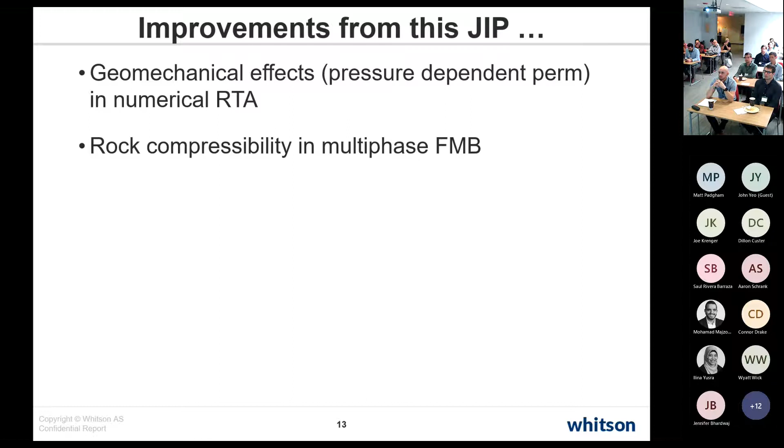Just to mention a few things we've added as a result of the consortium: being able to account for geomechanical effects in both the fracture and the matrix in the numerical RTA workflow. Adding in rock compressibility as an input to the multi-phase flowing material balance without rel perms. That was super interesting - we had some cases, very, very high compressibility systems in Vaca Muerta, and we saw that it was really, really important to account for this. Also multi-layer numerical models, not only petrophysical numerical models, but also having different fluids or PVT in the different layers.

Fractional RTA is another thing we've included as a result through these interactions with you all, but there's also a lot more.

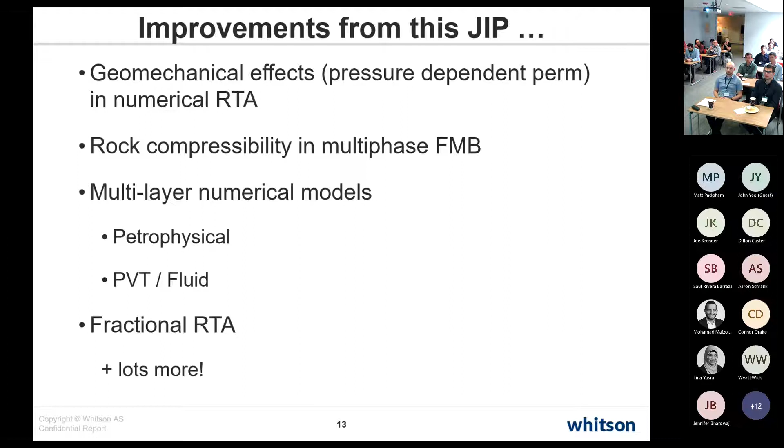And we're very proud to actually have - I did a counting yesterday just to have a sense of how many wells we've been able to get in with production data, so that's rates of all the phases - and that's actually more than 50,000 wells. And if I took in all the wells where we just have PVT calculations and stuff, it would be more than 100,000 wells that we've had in the software throughout this last year.

So really good, and we have really appreciated all the community and all the feedback you all have been giving. I feel like almost everybody in the room here kind of has their own little feature in the software, or something they've requested that we've been able to get in there.

So just continue to do that because we take that very seriously, and literally every single feedback we get from you all, we put it in the backlog, and then the priority of when we'll implement it is just a function of how many people have asked for the same thing. And we try our best, when we have a feature implemented based on a request, to also follow up with people to let them know if we've been able to get it in there.

Great, so that was a quick update on the consortium we've had, and we'll also see some other results of that, more practical, a little bit later. But just so it's easier for you all to digest what's going to be presented here - not by me, because I'm going to present just more basic things - there are a lot of presentations later today that will probably assume that you know at least a certain amount of RTA.

I want to make sure everybody is on the same page before we go there. I'm not going to go into nitty-gritty equations, I'll keep it practical, but I'll repeat some things throughout the day because they're fundamental. The first thing I always show, and some of you have seen a million times, is very fundamental.

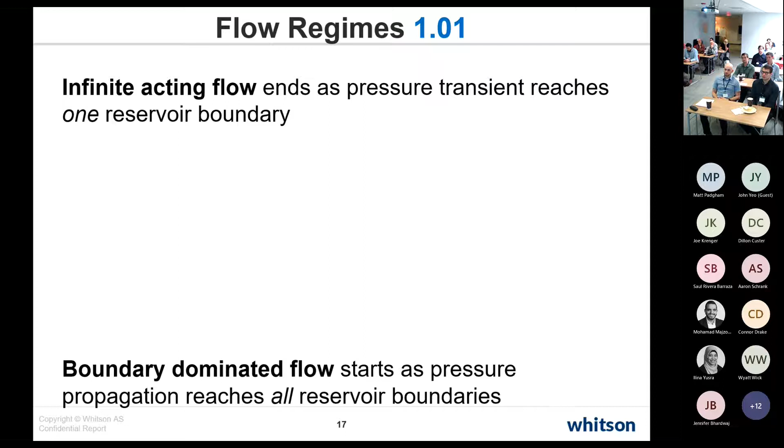Rigorously, boundary dominated flow starts once pressure propagation has reached all the reservoir boundaries. Then there's a very important flow regime, highlighted more throughout this consortium, called transitional flow. Transitional flow is in between these two extremes - some parts of your reservoir are still infinite acting, and some parts are in boundary. It looks like a power law relationship on well performance.

This is super important and something we'll talk more about later today. That means if I'm a well here, I might have started feeling the boundary over here, but haven't felt the wall over there yet, or the wall over there, or over there.

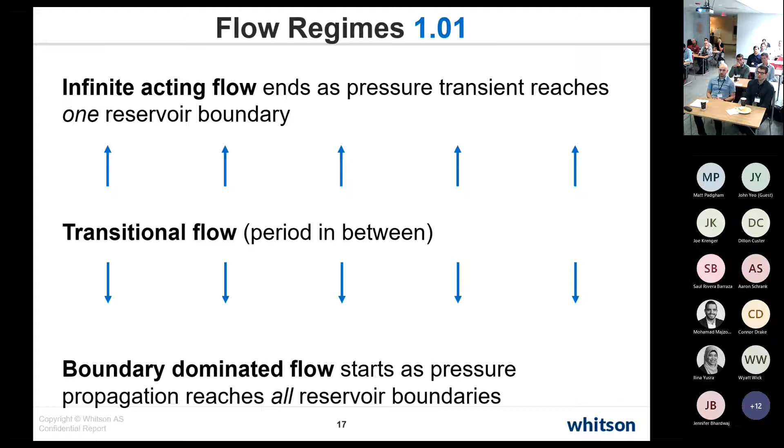Second thing is what we can derive from RTA. If you have production data, bottom hole pressures, and PVT - if those are the only things you have - you can still do RTA. You don't have to know the height, well lateral length, etc. But the things you can resolve are only two: your A-root-K, which correlates with typically early time cumulatives like 1-year or 90-day cums, and the contacted oil or gas in place.

But it's very important to remember, if you don't know the flow regime, talking about these things doesn't make sense. Your A-root-K can only be observed if you truly observe infinite acting linear flow. And for contacted oil or gas in place, you have to be in full boundary to say what it is. So if your well is still transitional or infinite acting, you can't say with certainty what your OGIP or OIP is, and you can't say anything about your final EUR because you haven't seen the whole tank.

It's impossible to do that exercise. This is extremely important because many of the wells we're dealing with might have seen some boundary effects, but it takes a long time before you're in full boundary, or you need very tight well spacing to see it.

When we talk about contacted oil and gas in place, don't mix it with petrophysical oil and gas in place. There was a survey earlier this year - we asked companies, if you take the petrophysically mapped oil and gas in place and compare it to what you resolve from RTA, there's basically a haircut of almost 80 to maybe 60%.

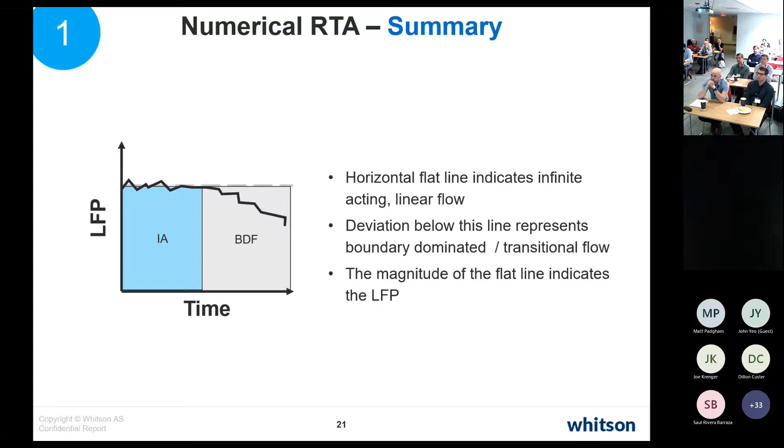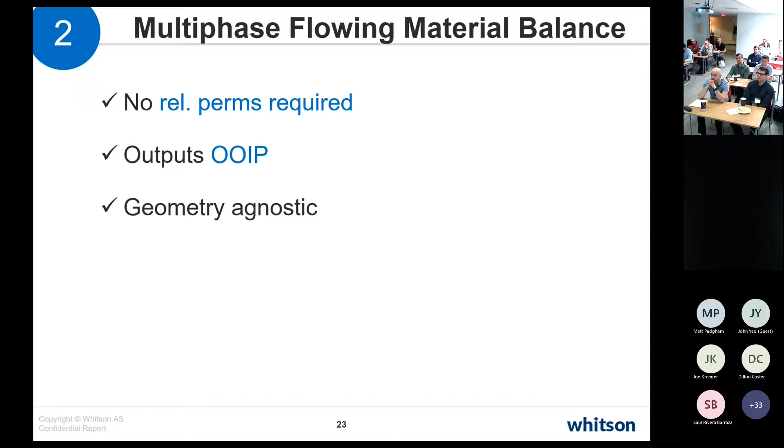So when people are showing this later, that's it. Multi-phase flowing material balance - we know this method, we talked about it many times before. It does not require rel perms. It outputs the contacted oil or gas in place. It does not care about geometry, but it assumes boundary dominated flow or pseudo-steady state.

So what does that mean for when you do RTA? Well, it means you can use it as a lower estimate, or the estimate if you're in full boundary. So many times people are like, yeah, I get a much lower original oil in place from my multi-phase FMB compared to what I get from numerical RTA. Well, it's probably an indication that you're most likely still in transitional flow or infinite acting, at least transition. So a lot of people here use it to bound RTA work, or at least question your RTA work.

And we'll see that's super interesting with the interpreters - I think everybody did it independently, but all of them used it to kind of question some of their results and did it iteratively from there.

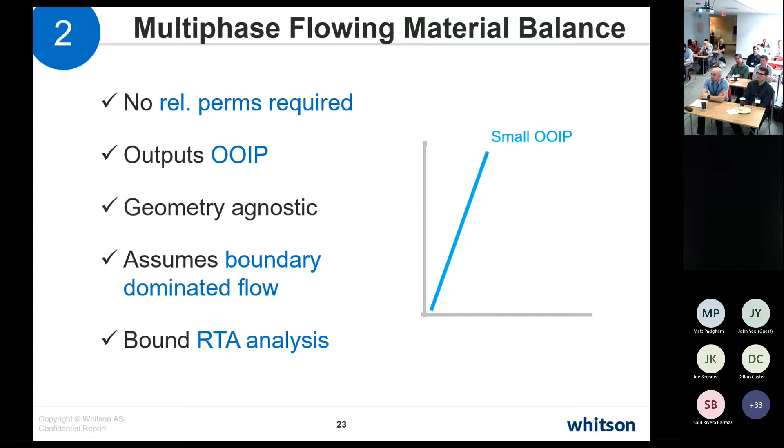The diagnostic plots are super simple - just some plots or points on a graph. You're trying to pick the shallowest slope that you see. The inverse of that slope is your pore volume. So this is a small OIP, this is a big OIP, and this is a bigger OIP, and that's it.

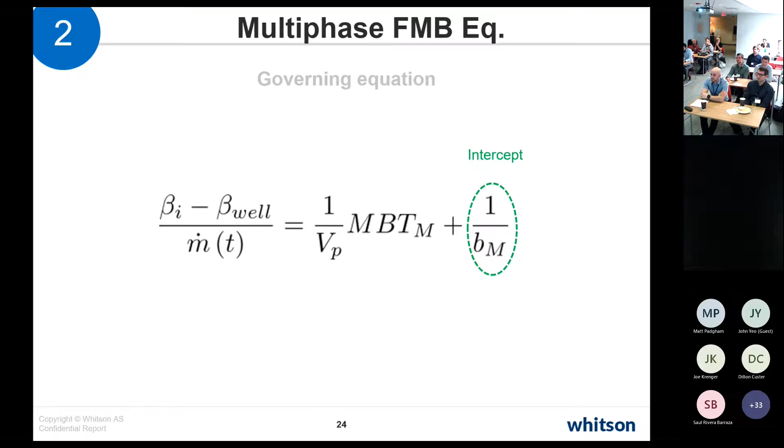The equation - I promise no equations, but it is actually super simple. So it looks very dangerous, this equation, but it's actually very simple if you break it down. This is an intercept, material balance time, pore volume, mass rate - so think oil, gas, and water, all added up together in a tank just on a mass basis.

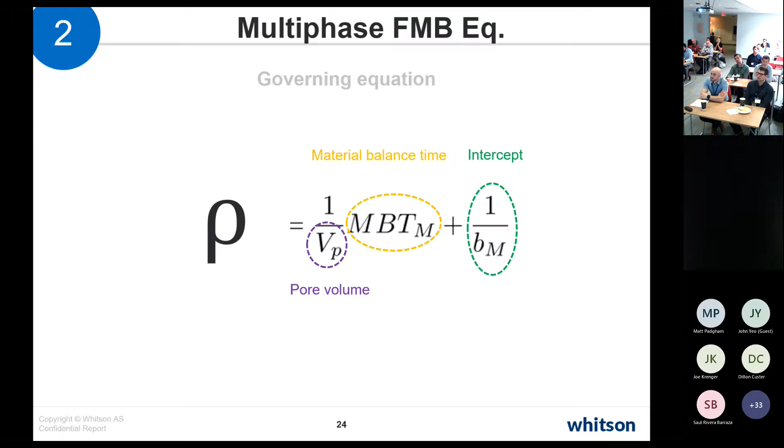And then this is something called mixture density change. What is mixture density? Think you have a tank, oil, gas, and water - they don't actually mix, but you can measure the volume and you can measure the mass. So just think about that, it's kind of like a multi-phase density, if you like. If you multiply mass rate on both sides here, it's actually something that's really dear to our hearts: density is equal to mass over volume, just multiply.

And the beautiful thing about it is that it's also a linear relationship, which is what everyone here in the room likes. If you're an engineer, the dream is to have something that is extremely complex but simplified to a linear relationship. So that's multi-phase flow, highly nonlinear PVT.

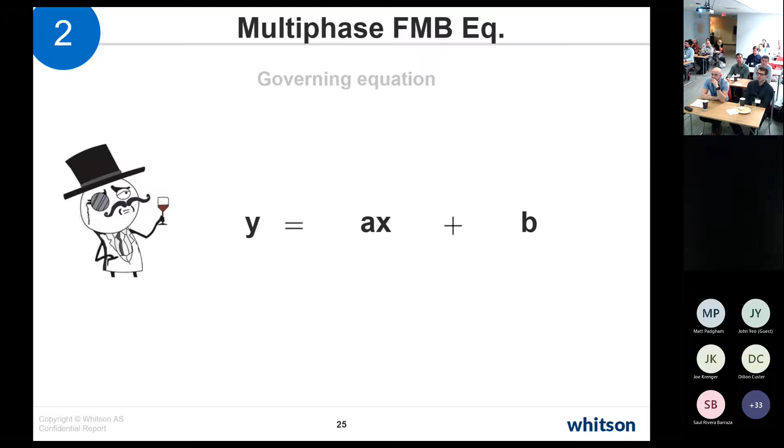Superposition effects, etc. The big thing about this method is that it does not require rel perms. And that's a question we get a lot, and we spent some time in the course last month to talk about why we do not require rel perms here. That's obviously unique, right? Because rel perms is something we really don't have for many rocks, at least in unconventionals. The short answer is this.

So rel perms and PVT, what does that give us? These two things together, they give us fluid ratios. And what is fluid ratios? Fluid ratios is water oil ratio, CGR, OGR, you name it. That's fluid ratios. But what we're doing with the multi-phase flow material balance method is that we're actually using the historical data only to back out the fluid ratios. We use the fluid ratios from the field, and we don't need rel perms for that.

But if we went into a forecasting exercise from this methodology, then maybe you would need rel perms. But that's also why in that feature in the software, for instance, we're not forecasting based on rel perms. We're just forecasting the fluid ratios versus time.

And just to make that 100% clear, if you look at the formula, for instance, for producing GOR, right here, this is producing GOR. This guy right here, that's a solution GOR. These guys right here are just PVT properties. So these are PVT properties. And these guys right here, KRG, KRO, that's rel perms. So fluid ratios, and there's an equivalent equation for all ratios like this. So it's just PVT and rel perm.

Okay, and the reason why we don't need it, the short answer, is we're using whatever we have in the field, or if we're doing a forecasting exercise, we forecast the ratios instead of using rel perms. And it's just extrapolating that trend.

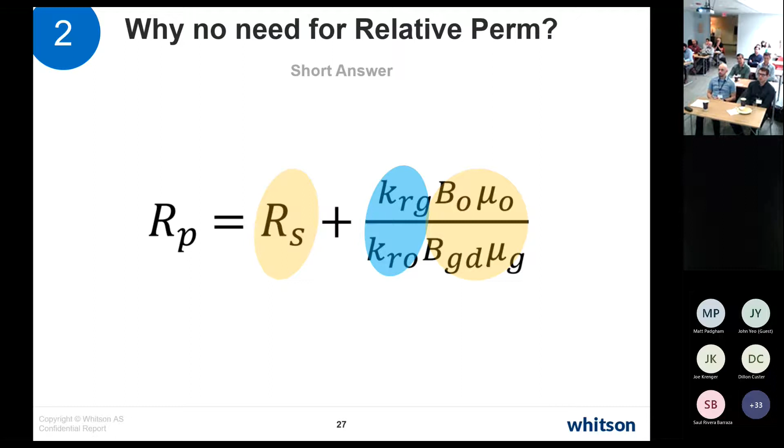The last thing is fractional RTA. What's the difference between classical RTA and fractional RTA? Well, classical RTA gives us LFP equal to A root K. And if you think about it, back to school, what is A root K? That's just AK to 0.5. We'll call that term delta, the 0.5 term. And then Jorge from Chevron, he and that group came up with fractional RTA, just a more general way of solving for your LFP.

So now in fractional RTA, you can solve for any complex system of fractures, and what you're resolving in terms of LFP is a k to the delta. My analogy is always that, okay, if you do ARPS, the classical RTA forces you to always do ARPS with a B factor equal to 2 on every single fit, and now you're allowed to change it from 2 all the way down to 0. Very simple way of diagnosing the delta for a given well.

It's literally just a rate normalized pressure plot versus time. This is exactly the same thing you do on the square root of time plot, by the way. This is just exactly the same thing on the y-axis, but you just do it versus real time and then not square root of time, and you just do it log. So you can do this in Excel very easily in Whitson Plus, etc. And the exponent here, or 1 minus that exponent, that's your delta.

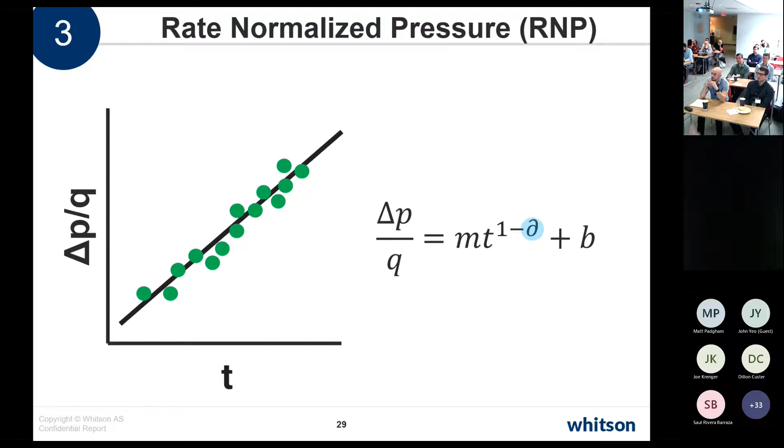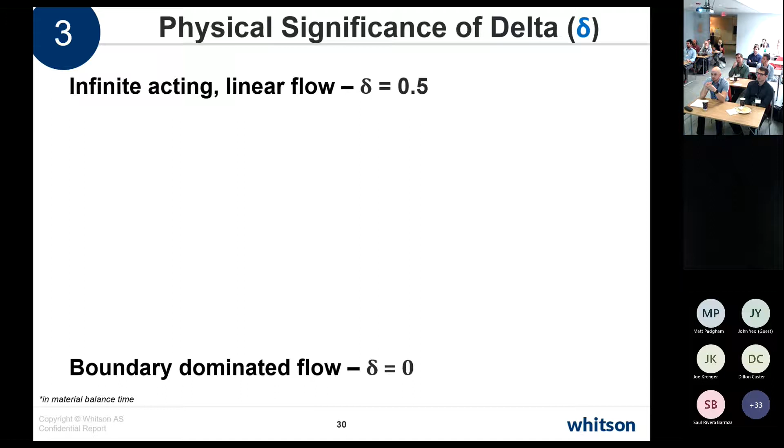And why do we need delta? Well, the physical significance of delta, when delta is 0.5, we're infinite acting. Boundary dominated, delta is 0. So remember, this is all in material balance time. And if you're in transitional flow, the delta is somewhere in between. There's a very nice diagnostics to tell you, okay, where is my well in terms of flow regime? And it's very, very important to do that.

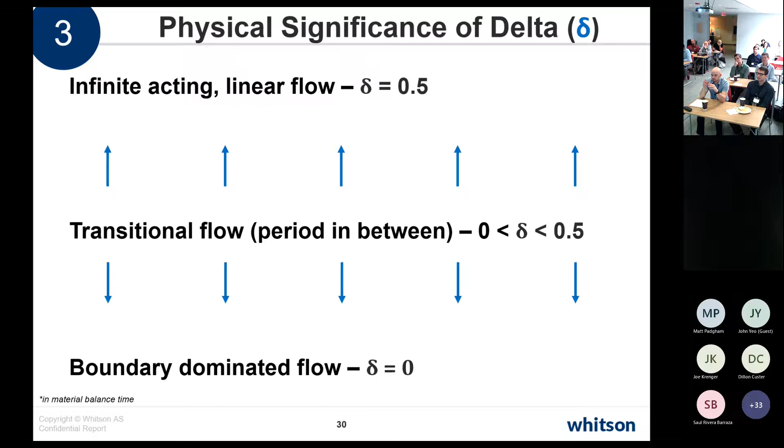Okay? I think everybody now, that was even less than 10 minutes, which is even better. So that's the crash course in terms of at least the new things that people haven't been exposed to before.

I'm going to spend 2 minutes on this thing, what I call anomalous confusion. So there's been a lot of things in the industry the last 10 years, I think, about we need new physics and everything to understand unconventional well performance. And it's been like, classical diffusion doesn't work for the purposes of unconventional rocks. We need new type of physics, typically referred to as anomalous diffusion. So I'll just give a couple of thoughts around that just for the group here. So because it's very relevant for the group.

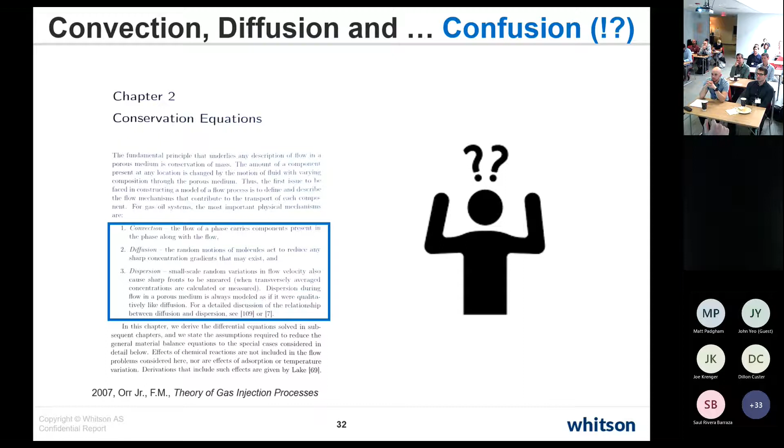So when it comes to all of these terms, convection, diffusion, it all leads to confusion in the end of the day. But there is a claim in the industry that unconventional wells do not exhibit classical Darcy behavior, but rather a power law behavior that results from anomalous diffusion. And that's a claim.

We all agree that we see power law type of behavior for a lot of unconventional wells, but that in itself is not evidence that we're dealing with new physics, anomalous diffusion. We've talked about this many times throughout this project: you can go to a pad and see a wide range of deltas on the same pad. Some deltas are 0.5, and Darcy flow is perfect, it's not a true power law relationship, and it goes into boundary at some point.

That's like the legacy completions. Then you have some that show a 0.3 power law relationship for their entire life. Then you have some exhibiting a delta of 0, so boundary dominated from very early on. My point is that if it was just the rock, or something special with the rock, every single well on that pad, no matter how you completed it, should give you the same indication of a power law type of relationship. We don't see that in reality. We see a mix of it.

That's going back to getting this type of relationship. You can get that from just a mix of infinite acting flow and boundary dominated flow. There can be a lot of things that cause it, so heterogeneity is a very easy way to model it. And if you add superposition effects and multi-phase flow effects as well, you can get it in many different ways. So there's not only one answer to that.

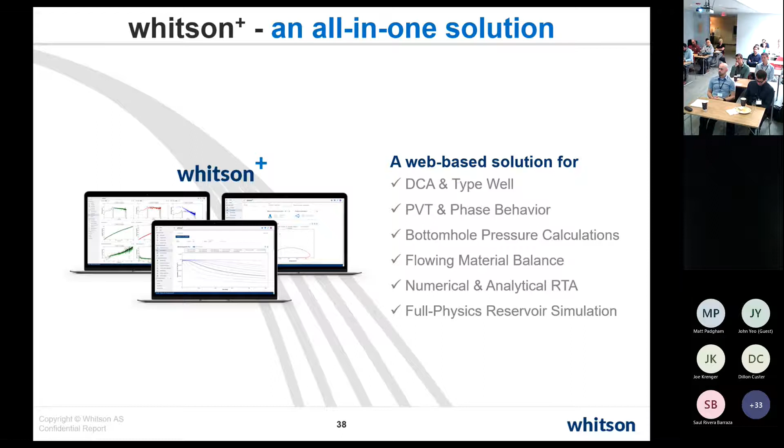The last couple of years have gone very, very fast. A little more than two years ago, we wrote the first line of code for the software, and since then we've been extremely lucky to work with now close to 50 different operators in unconventional. That's been happening very fast. But in general, our mission is to just keep it simple.

When we talk about making it simple, it's not only about the user experience, we want to make everything about the product as simple as we can. So we want to make it one product. That means all the features that make sense to have in whitson Plus, we'll keep them there for that audience, all the currently developed features and all future modules. There's also one price, so everyone knows that, with an unlimited number of seats, which is also super simple. It's one interface, and you just find it on the web, so it should be seamless to move from one module to another.

And then for most companies, or at least the companies that would like to have it, we offer single sign-on. So you just go to your company name dot whitson dot com, click single sign-on, and you log in with basically your email.

So we try to keep it simple, not only on the user-friendly side of things, but also when it comes to working with the product and the pricing and so on. The other thing we try to keep simple is the cloud integration, and that's been very successful with at least the companies that have been interested in doing that.

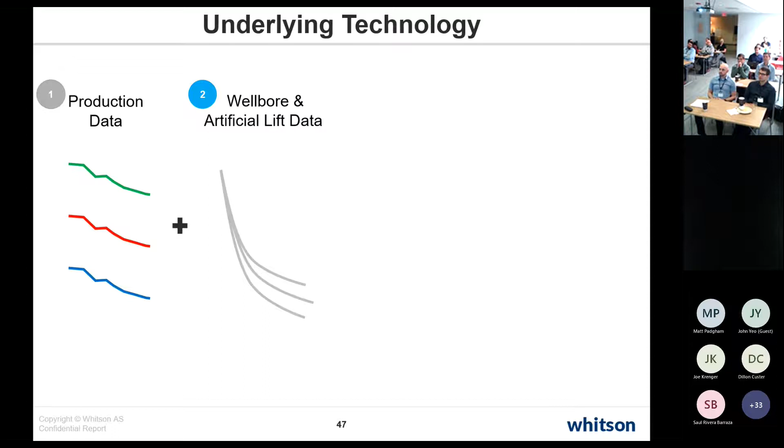So you have production data, you have your artificial lift and wellbore data. You marry that with some integration of choice, and it results in you being able to compute bottom hole pressures on every single day for every single well. So when you open the tool, you have production data for every single well updated until today, and bottom hole pressures updated until today on every single well.

It sounds like a big thing to do, but we have multiple of the clients here today, and we've been able to set this up in less than a week on all the wells they have internally. So if you want to make it quick, it's very easy to make it quick.

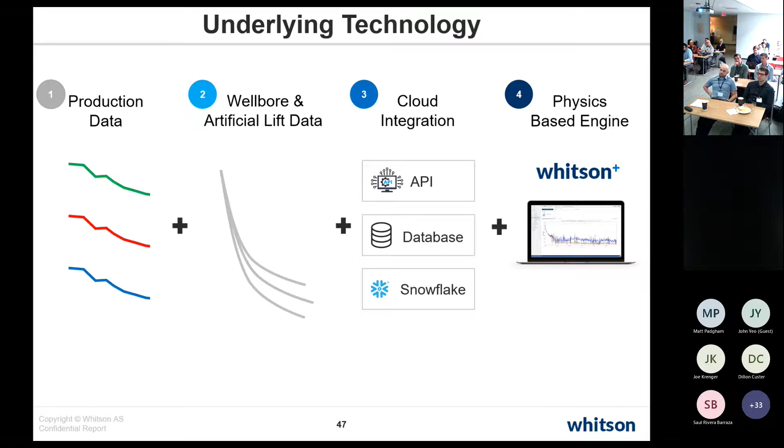In general, we've also tried to focus on getting new technologies into the tool. But probably most importantly, from here going forward, our goal is to have the best support in the industry. That's very important for us.

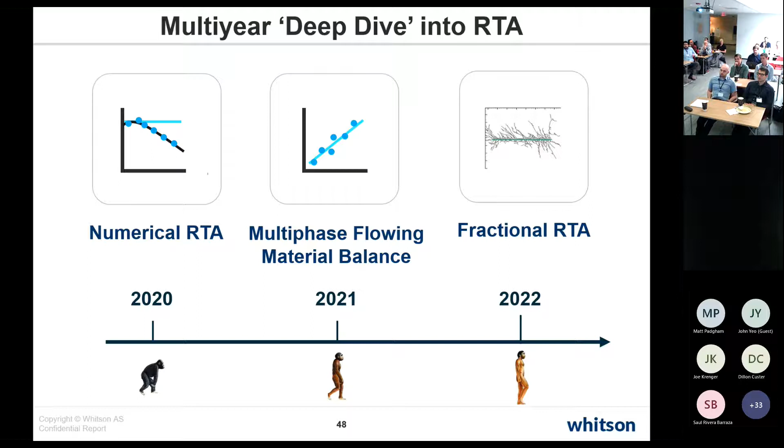On average, our response time to support tickets is less than 2 minutes. Obviously, if it's a feature request, we can't always get back in 2 minutes with a new feature, but being responsive, letting you know we're here to help you with whatever it is, using the tool, or just brainstorming about different items you're observing with your data, is something we take extremely seriously.

Everybody on the team, whether developers or people more on the technical side, shares this joy about working tightly together with the users. That's the only way we've been able to get the tool so far in less than 2 years, and in that direction. So there's a release this week.

There's a bunch of new things, but I'll focus on some of the main things. Stian will have a presentation on one of them. The biggest thing that has been requested by all of you, and I'm so glad it has come in this release, is really related to saving cases.

So if you're doing any type of modeling on the physical front, let's say a numerical model, numerical RTA run, multi-phase flowing material balance, or maybe a bottom hole pressure run, you can now go in as a layer under the well view here, where you can create a sensitivity. That means you're not creating a new well, you're just creating a sensitivity under the well layer, and you can see all the sensitivities you run under the well level.

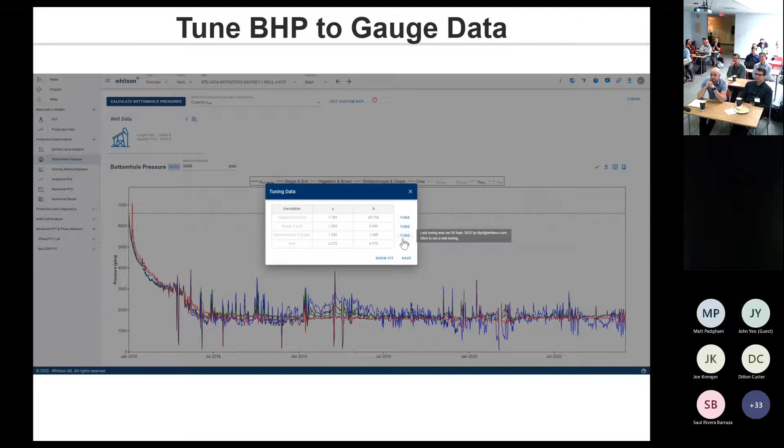Even though I know a lot of you have done more field-wide studies of bottom pressure and comparing which correlations are doing better and whatnot, a lot of the studies that we've done, at least with this group, yielded pretty good results.

The last thing is, one of the most popular features in the tool is that when you calculate your bottom pressures, you're able to smooth the bottom pressures graphically, and you don't have to do that in Excel and stuff, and that's a big time saver. Based on requests from Stephen Young and others, being able to do that on every single time series data that we have in the tool is something we're now allowing for.

So why is that important? It's important because many times we're dealing with allocation issues, etc., in the production data that we have. So you can say that parts of the data I would like to smooth, maybe parts of the data I would like to shift up because of an obvious allocation issue. Maybe the tubing pressure is obviously off, maybe there's some outliers that don't make sense, maybe I'd like to ignore them. I can do that very easily.

And then you can choose whether you would like to use the raw data, or whether you would like to go in and actually use the smoothed version of the data. So that's also coming in the release. I got a note from Marcus, our CTO on the software side, that we're releasing it for everyone tomorrow. This can be parts of the data, several parts of the data, etc., but it's extremely powerful to do that on all the time series data, just in the interface itself, because a lot of people have done that in Excel and then moved it back in, and it's really, really time consuming.

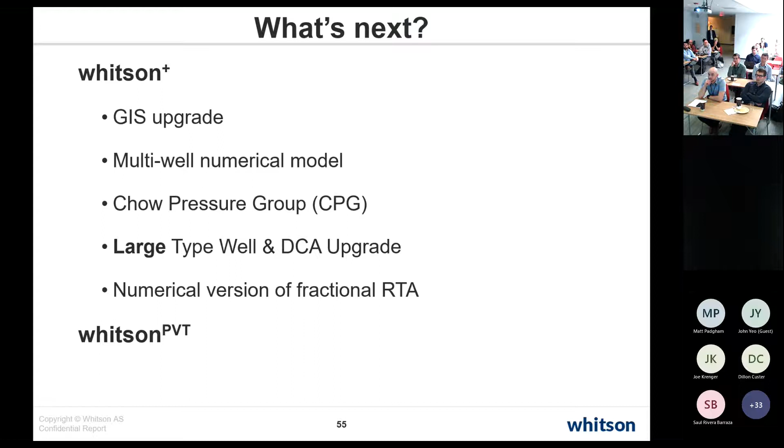So in Q1 of next year, we're launching something called whitson PVT. It's a whole separate product, so it's not necessarily relevant for all whitson Plus users, but it's basically a competitor to PVT Sim. We'll have fluid data management, so instead of uploading wells, you're uploading samples and lab data. Then you can create field-wide equation of state models in that tool, and easily export or import those into whitson Plus if you'd like.

Marcus will mention a few more things on that later. And I think that's probably it. Any questions?

Yeah, I have a question. Does whitson have any intention to do a similar JIP for DFIT tests, reservoir pressure across multiple companies? So like on DFITs, you said? If people want to do it -- no, we haven't thought about that.

I know there's some -- you've been involved in some of the DFIT consortiums as well. Maybe Craig, you were at least in one in the Bakken, right? Early on, ResFrac did a DFIT JIP. And so it was more to advance the analysis than to develop analysis tools. Yeah, and that's been published -- you can pick up the paper by Mark McClure, the principal author.

If there's big interest on that -- initial reservoir pressure is a big uncertainty, right? Initial reservoir pressure and also flowing bottomhole pressures, those two things are super important when you do RTA. If those are off, then you're kind of screwed already. But that's maybe something we can look into if there's any interest on that front.

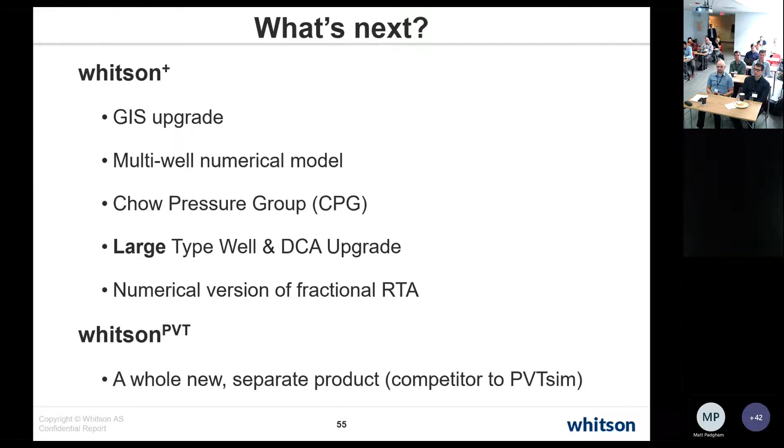Are you thinking of putting something related to flow assurance? Yeah, flow assurance related calculations will be there - hydrate models, asphaltene models, etc. will eventually come in. So it's going to be a full competitor to PVTsim. That's going to be a big focus. And we have people like John Ratalovsky working on that, who was with Schlumberger.

That would be great. Next up is Marcus. The reason we have this presentation is that everybody who uses Whitson Plus does a lot of thermodynamic equation of state calculations by very simple means. Our biggest message is that it's not magic or a black box - it's based on a very rigorous process developed, with Curtis Whitson in the front row, over the last 40 years. It's only built upon physics, mathematics, thermodynamics, etc. Marcus will run you through how you can quickly get a good understanding of how that work is done. So with that, Marcus, take it away.

Good, yeah. Don't worry, you're not going to have to do any thermodynamics here today. I mentioned to Braden already - this is the time, if you're not interested, to sneak out and get a drink early if you're that type of person. There's a song, it's five o'clock somewhere. Actually, for people in Norway, it's five o'clock now, so they're probably having a couple drinks already, so that's fine. I want this to be a practical guide, so you can see the workflow I use to develop field-wide or basin-wide PVT models that you guys can just use and enjoy.

If you want any of the real details, this is the paper I would go look at - let us know, we can send the link. It's by my colleague Bilal et al., who always makes the best papers. So that's the paper to go read.

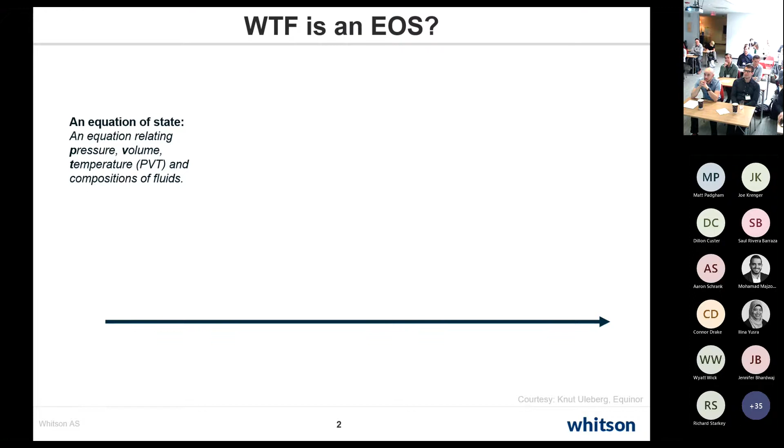The first question you want to ask is, what is an equation of state? It's really just an equation that relates pressure, volume, and temperature - PVT, as we like to say - as well as the compositions for your fluids. I'll show you a little bit of a timeline of the history of equations of state. I think everybody here is familiar with the ideal gas law - you might remember it from high school chemistry. That's the first real equation of state for ideal gases.

Then van der Waals came a little bit later and made a more complicated equation that actually did more accurate predictions. This was the first cubic equation of state - so if you've ever heard that term, he's the guy to blame. For most engineering purposes, that's still what we use today. It's more or less exactly the same function as van der Waals, just a little bit more complicated, but we're not going to go into the details there.

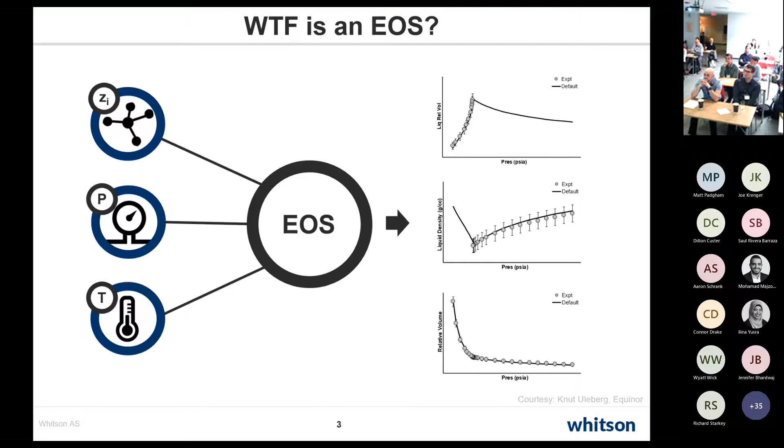As I've already mentioned, you can just think of an equation of state as a black box - you give it a pressure, a temperature, and a composition, and if you have a good thermodynamic engine, it'll spit out your results and you'll be happy with that, you don't have to think about it anymore. Now if you are interested... basically it's just a set of choice of an equation.

So you can choose Peng-Robinson or SRK or whatever model you want. Then it's going to be two sets of tables, and that's what we provide in Whitson Plus and everything else. The first one is the component properties, just describing each individual component. And the second one is the set of parameters, which are the binary interaction parameters. We don't need to go into that—I did my whole thesis on it, and I still don't know how they work.

One important thing to note here is that the C7 plus properties, starting from your C7 all the way down, these are always unknown. They're not in some table, you don't know what they are. So these need to be found and approximated, and that's what most of what we do when we do EOS model development.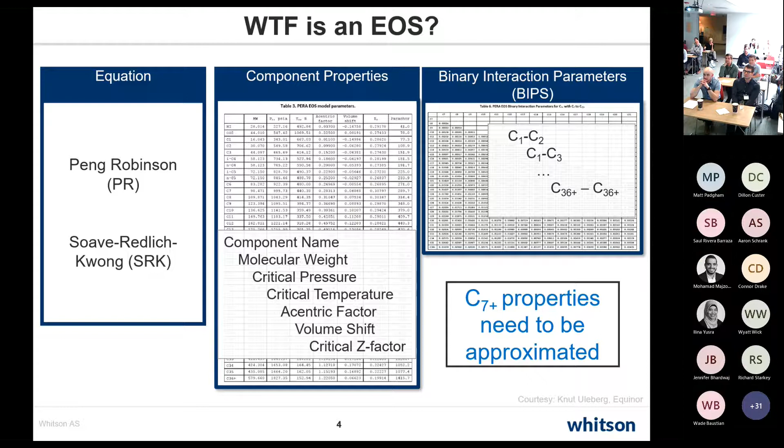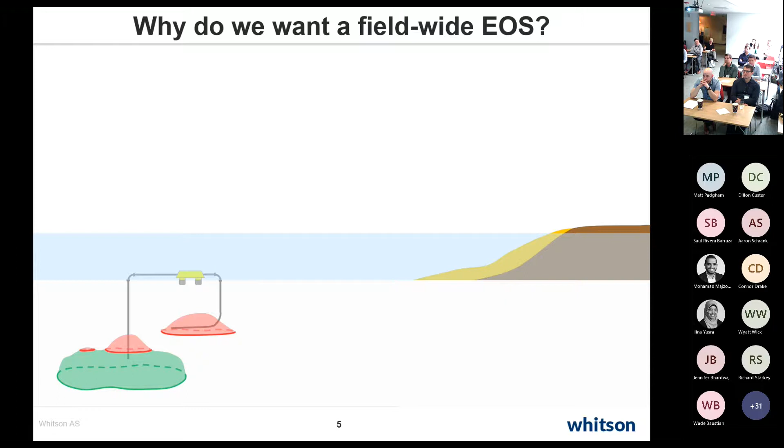Okay, so just to set the stage, just imagine—I know most of you guys are unconventional folks, but just imagine we have something like this. We have a system where we have two reservoirs: one which is an undersaturated reservoir with gas at the top and oil at the bottom, and a second one being like a gas condensate reservoir nearby. And way back, maybe in the 80s, you drill a vertical well like that, and you maybe only want to produce from the gas cap, for example. Then a couple of years later, you see you have this gas condensate, you want to drill through that, and then you commingle those two fluids into a manifold and produce those to a platform like this, right?

At this point, you don't really know what's happening with the flow and all that stuff, so maybe you want to add a multi-phase flow meter down here. Then after a while, your boss asks you, why aren't you producing from this oil here, right? So somebody made a stupid mistake. So what you do, you drill a couple of wells in that zone, you take that fluid, put it on a boat, you ship it onto the onshore facility, and there you have the full system of a typical conventional setup.

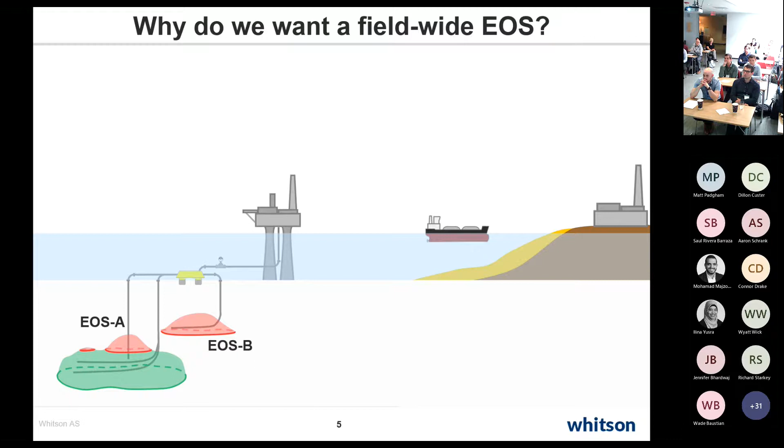Now, basically, the first thing that's going to happen is that you're going to need an equation of state for this part. And then that gas condensate, that's going to need a separate equation of state. Then you have your topside facility—oh sorry, this reservoir as well is going to have another equation of state. Your topside facility is going to have a fourth equation of state. And the multi-phase flow meter actually needs a very specific spec, say 10 components, and none of the other equations of state work for that, so you need one for that.

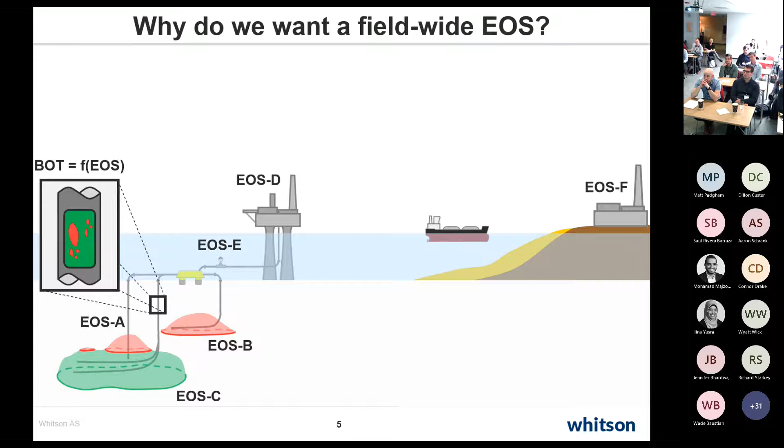And it gets even worse when you look at the transport equations. You need volumetric properties for all of those, and that's typically black oil tables or tubing tables. All of those are functions of the equation of state that you use, so you're going to have different black oil tables and tubing tables for all your different pipes. And then the topside folks, the surface facility folks, they're very picky with their components—they want their BTEX components, and that's very important. So you end up with a lot of fluid models, and that's fine, that's just kind of reality.

But the real problem here is that if this is done in the historical manner, then these are not going to be internally consistent. So the PSAT, or the saturation pressure for EOS-A here, is not going to give you the same result as EOS-D or F or any of the other ones. And that's an issue, so that's why we kind of want to create a common field model.

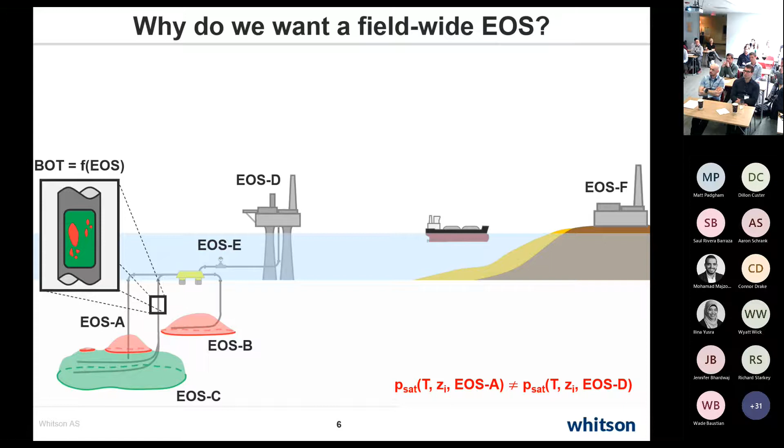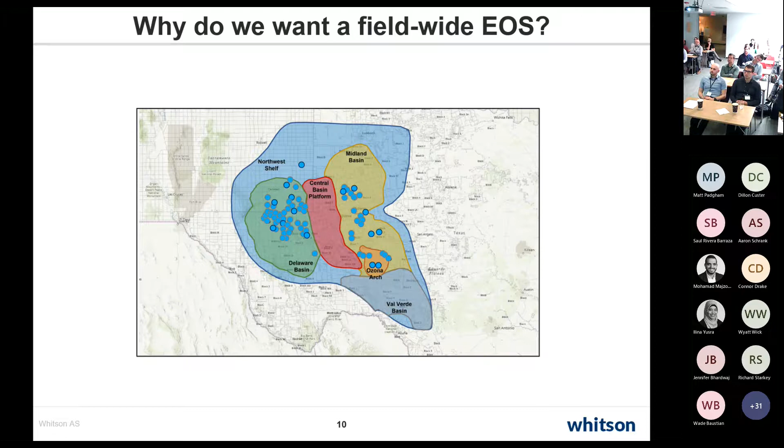Okay, so how do we know if we can create a field-wide EOS model? Okay, it's a big question.

The first thing is kind of the geoscience of it. And the question we ask is typically like, are the reservoirs or the formations near each other? Now, this is not a requirement for having a common EOS model. You could be lucky and have a reservoir here in Houston, in Texas, and one in Norway have the same EOS model, but that's just by luck.

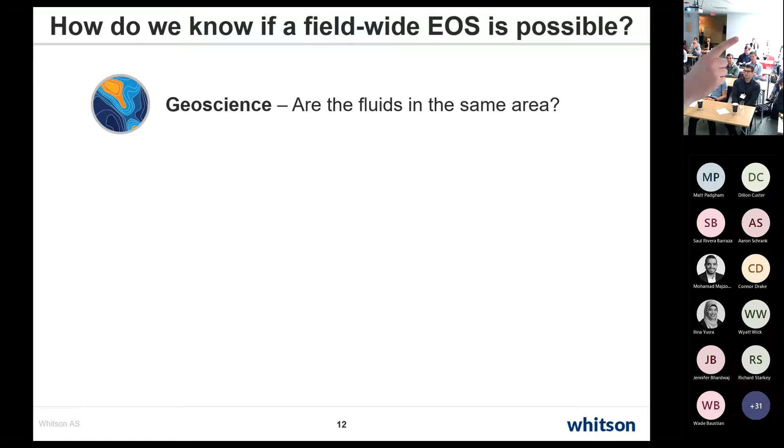Second thing is the characterization. And we typically ask, do the C7 plus properties have some commonality? That's kind of what that means.

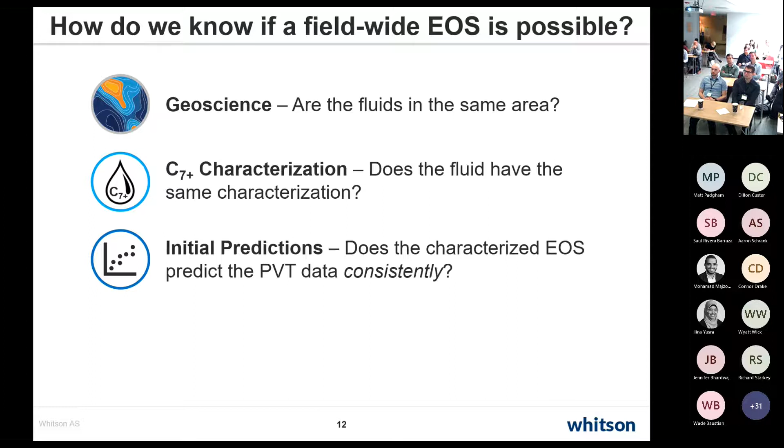But it really comes down to the predictions, right? If we're able to have one EOS model that can predict all your PVT experiments, that's the real test. So we always start with an initial set of predictions with our characterized EOS. Now, these are not going to be accurate, but we want to look for certain things to make sure that they're consistent. And then the real test, and the only one that's required, is this last one: can my equation of state predict all my PVT data? Okay, if there's not big errors in it or like contamination. We're just going to assume that the first one is okay.

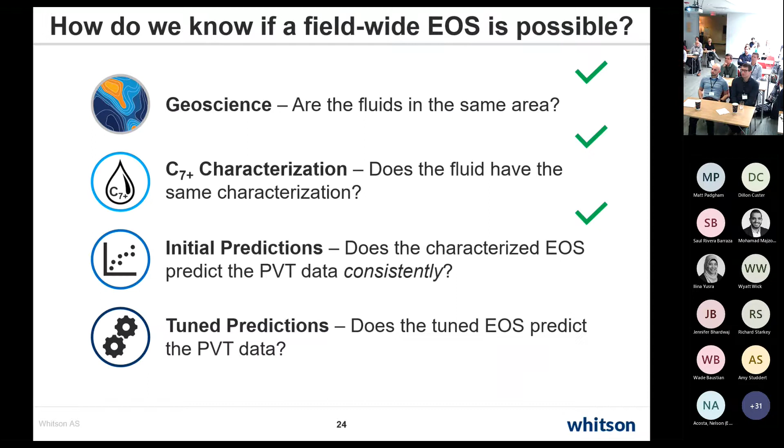Okay, that's good. So if we go back here, we're getting close to the end now. This is what we had, right? We had all these different fluid models. And the question is, how can I make them consistent so that they all predict the same thing?

They have all different component slates, number of components, and this and that. And the solution that we use is basically we make a parent EOS model. That's the one we develop when you do the tuning. It is very detailed, has a bunch of components, and it's not going to be like if you put it in your reservoir simulator, it's going to take 100 years to run. You use that model to create your child models.

So A and F, for example. And you pick those components, those EOS models, so that they predict the same thing. And you do the same thing for EOS D, and you do the same thing for all the other ones. What you end up with then is something like this, where you have one parent EOS model which has created all of your child fluid models.

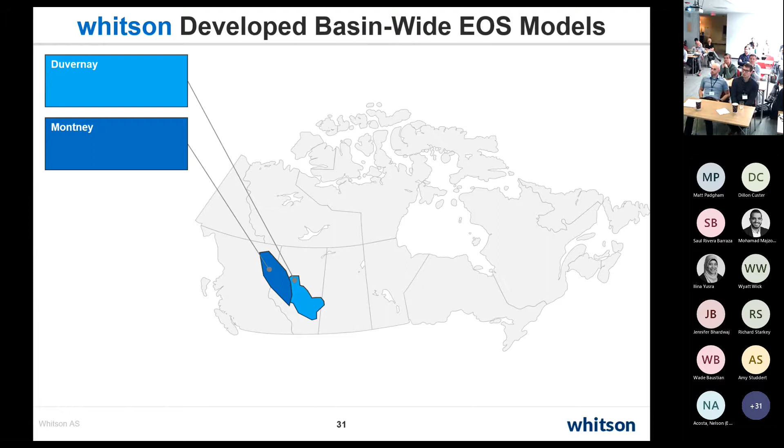The benefit of this is that they're all going to be internally consistent. I can talk about this EOS modeling forever, but the proof is in the pudding, right? So these are, I think, most of the basins that we've developed basin-wide EOS models for in the United States. And then here you have Canada. We also have South America and Saudi. So it's not just an academic concept that we'd like to talk about - it's actually something that we do every day at whitson.

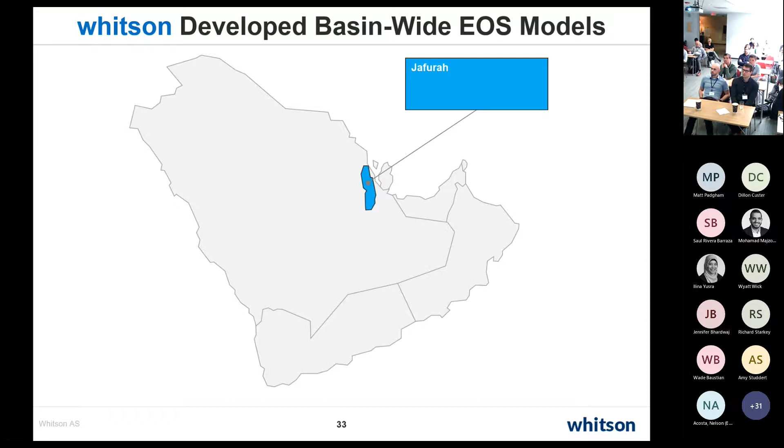So then the question is, well, how can you create a field-wide EOS model? And I'm just going to insert a shameless plug here - that's the software that we're working on now, which will hopefully be commercially available in Q1 2023.

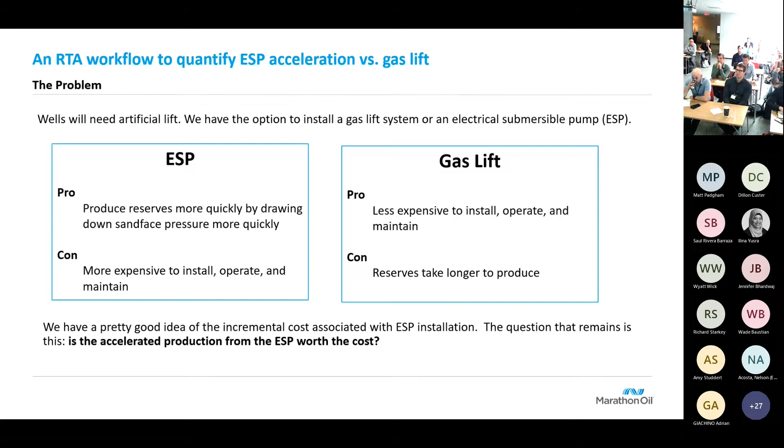The premise is we get asked all the time: should we put an ESP in this well or gas lift? What I mean is, should we put artificial lift that materially increases the drawdown more rapidly and enhances early life productivity, or should we operate our artificial lift more slowly so we don't deplete the reservoir as quickly? The question for reservoir engineers is really whether the accelerated production associated with installing an ESP is worth the cost. It's a pretty nuanced question.

There's more to it, like are we damaging the reservoir if we draw it down too fast? I'm not getting into that per se, but what I wanted to do here was use RTA as a medium to address this question of what the acceleration profile looks like.

A lot of times the easiest thing to do is take a sample set of ESP wells and a sample set of gas lift wells and compare them side by side to see which ones are better. Obviously the ESP is going to be better early, and you'd use that to say here's the amount of acceleration. But it's a bit too simple, because if your ESP wells are better, are they interfering with the gas lift wells nearby? Is the rock the same? Is the completion the same? It ends up being a relatively complex problem.

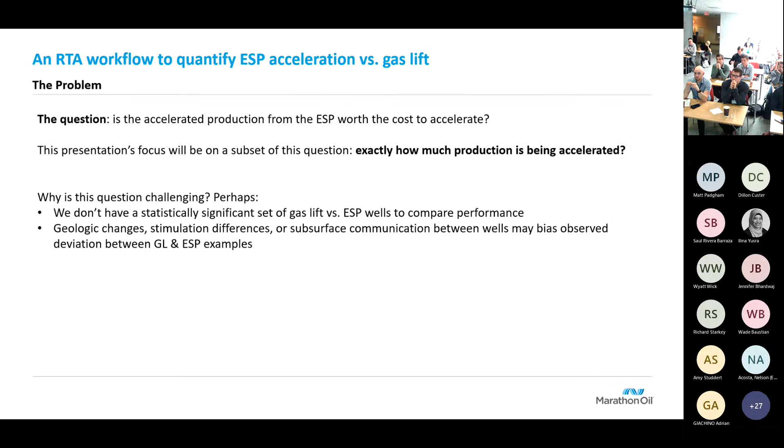So RTA ends up being a reasonable solution, because you can use the same physics-based reservoir model and iterate on what this might look like, make little changes to the model, and come up with a more robust and physically consistent answer to what the acceleration profile is when you increase the drawdown. So the actual workflow here, I've got it numbered 1 through 6.

Step 1: history match a well. You can do this with one well, though it works better with more wells, but pick a well that's on ESP preferably. If you have a free-flowing profile before you have to put it on artificial lift, match the well as best as you can. For the wells we did here in the Delaware, we had to include pressure-dependent permeability, and I'll talk more about the ranges we used at the end.

Match one well on ESP, then simulate its production profile, then go back and delete the portion associated with the ESP, forecast what you think the drawdown would have done on your other artificial lift, or if you'd drawn it down more slowly, run that, and then compare your profiles, run economics, etc., to drive your decision.

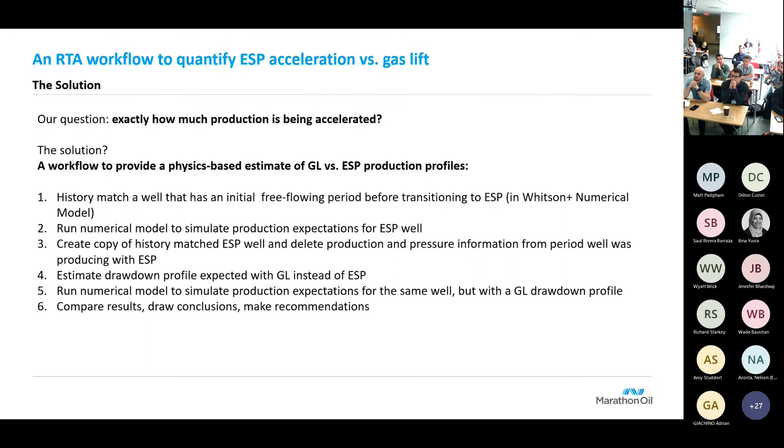So step 1: history match the ESP well, the same frame I'm sure all of you have seen many times. Step 2: forecast the production. The key here is this production profile - decide something reasonable where you're going to go with your pressures, and record all of those rates.

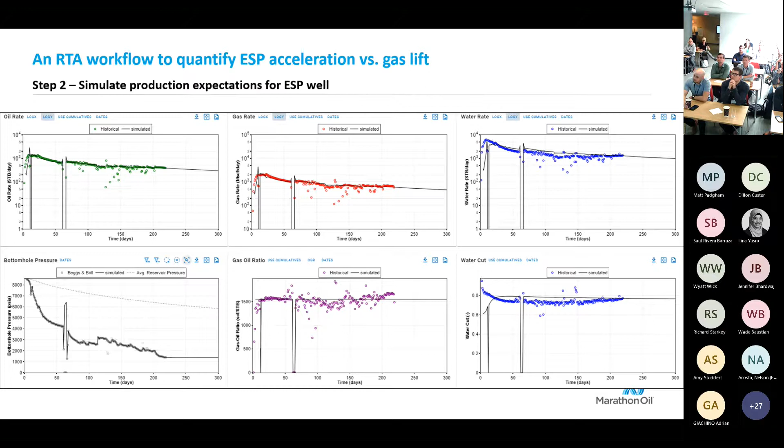Step 3: copy that well - which I guess now we'll be able to do scenarios instead of having to copy the well, so that'll be nice - but delete out the production data associated with the ESP.

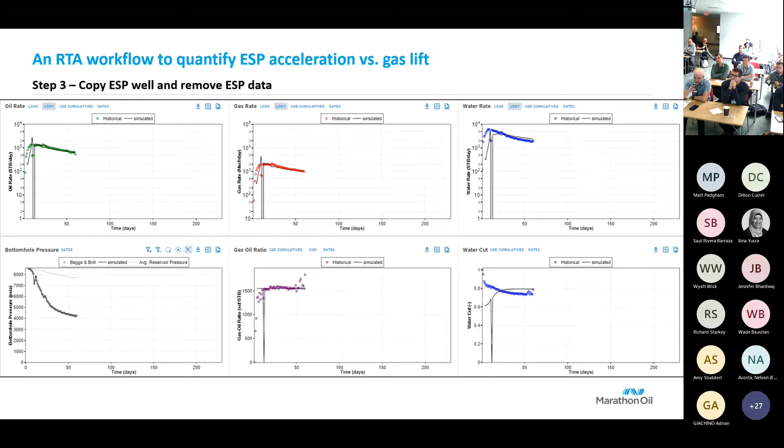Then come up with what you believe is a reasonable drawdown profile for that other artificial lift type. I'll show you later - I have an example where this particular well had an offset on the same pad that was on gas lift instead of ESP, so I had a nice analog to say here's what I expect the drawdown profile would have been like if we had used the alternate lift style.

So delete the ESP data, pick your less aggressive drawdown profile, forecast that out, and record those rates.

I didn't have a lot of memes when I figured out that process that I was going to have to go show this - I had to delete all the memes. So I included that emoji up there, just threw in a little bit for you.

So then you end up with a profile that you can compare ESP versus gas lift, accelerated drawdown versus not accelerated drawdown. That profile exists for all of time, and you can throw it into your economic modeling program of choice and come up with whatever iteration sensitivity solutions you want to present from there.

So just some notes on the methodology: obviously, it doesn't work if you don't have that free-flowing profile before and after to compare to.

It's preferred that you have a geologically similar well nearby to confirm what you want your alternate profile to look like, and the more wells you have, the more robust your solution is. Obviously each well can be individual, and these answers are also non-unique, so getting a sense for the variability in possible outcomes is easier when you have more wells to choose from.

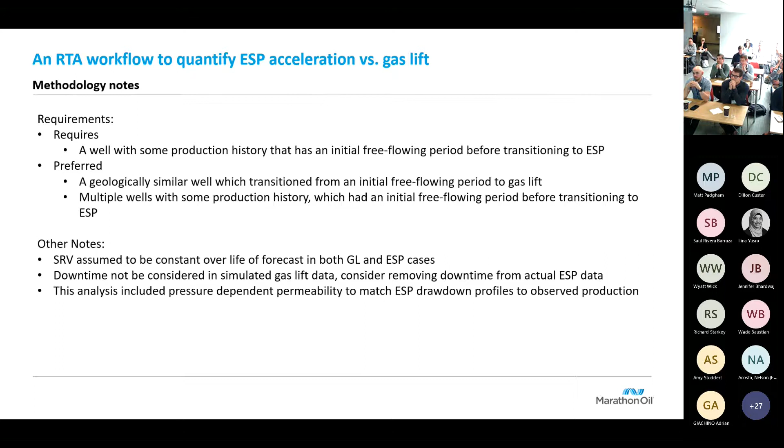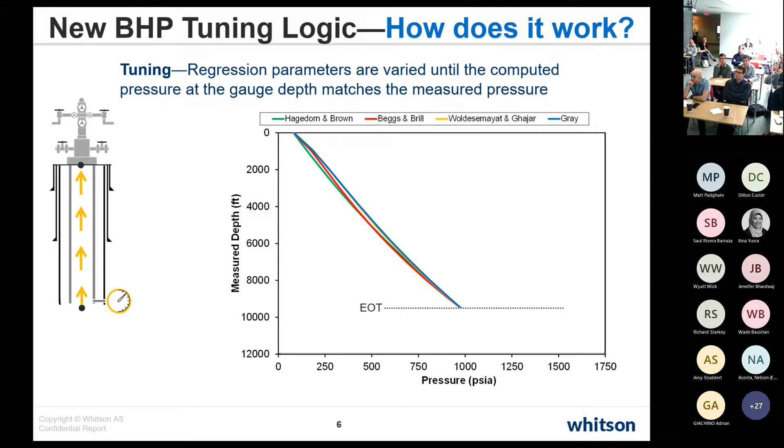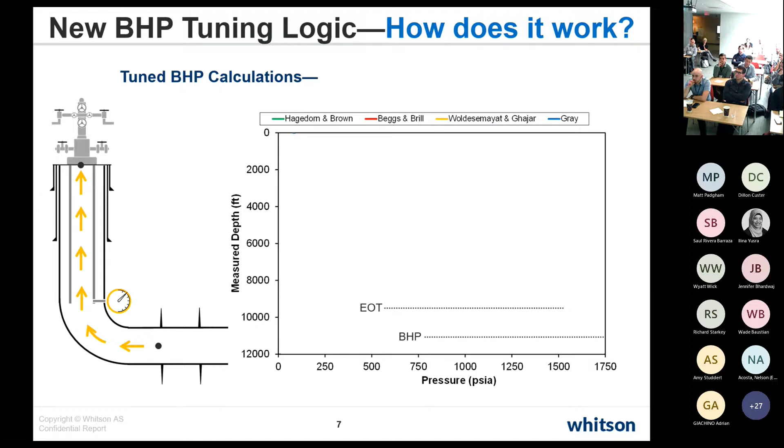Once the correlation is tuned, we recompute the full length down to the reference, to the top perforation, and now the spread is much less. Depending on how vertically different the gauge is compared to the reference depth, the spread in these correlations will widen if it's high up. If the tubing is all the way down past the kickoff point and into the lateral part, then it's essentially the same - there's no difference.

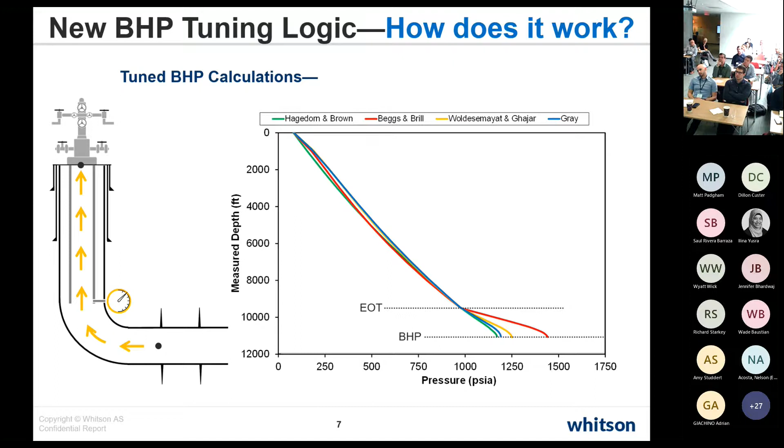So an example - I think Matthias already talked about what a use case could be for this kind of tuning - is a situation like this, the 1 gauge 3 wells scenario. Could be more wells also, but let's say we have 3 wells from the same pad. They are completed the same, they start producing at the same time and have similar drawdown profiles, etc. But only one of them has a gauge installed. Then what you would like to do to improve the correlations is tune the correlations in that well, and then apply those tuned correlations to the 2 other wells.

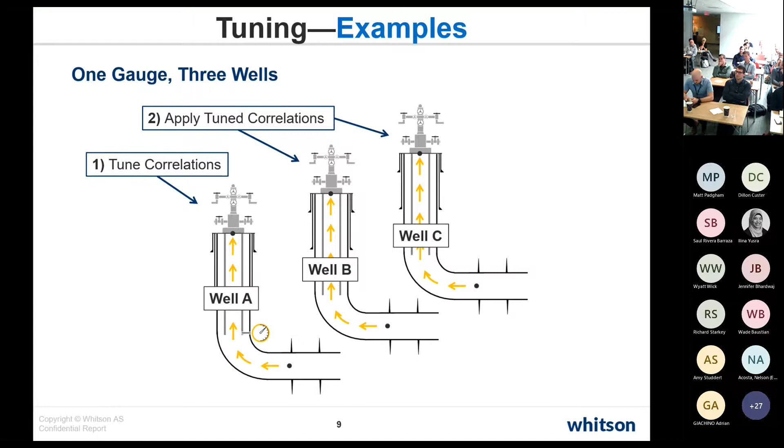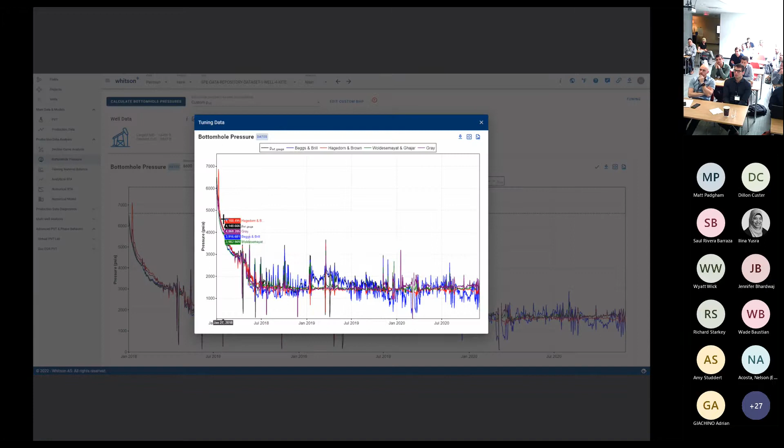I think if you start taking two wells that have very different production data and very different completions, one's on gas lift, the other's on rod pump, different things like that, you will have a harder time finding some parameter that fits both. So that would be my recommendation: start with that, and then develop something that applies to a smaller region or area.

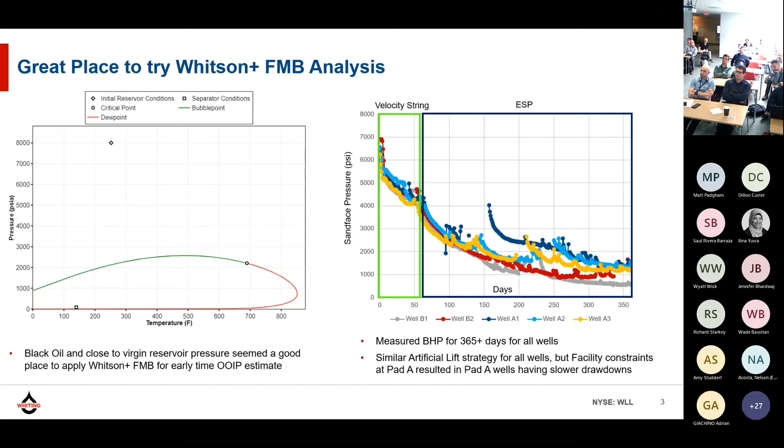Pad A was constrained. You can kind of see that here. I didn't color code these, but the A ones are basically dead up here, where these 2 down here, they were flowing harder. Anyway, it was really good. The point being, it's really good to have pressure data, really good time to use RTA to try to normalize that difference in drawdown.

I generally picked what I would call an aggressive slope. Again, I guess I did that for at least one reason, was that I was thinking this is going to be sort of the initial, it's initial, so probably the smallest. So go as much as aggressive as I can to sort of get what hopefully is the real contacted OOIP. But I did that consistently across them. I picked as aggressive as I thought I could from the data. And then obviously, made sure that the reservoir pressure was above the flowing bottom hole pressure.

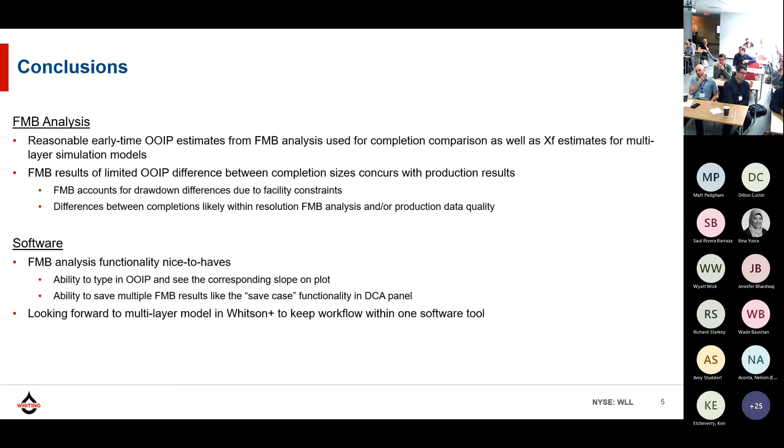Yeah, thank you. So I think the other part too is around really bringing in the room—are you varying your static model properties, like your saturation, porosity, as you move to different areas, or are you just using an average as a placeholder? Sometimes other operators—this is something we're really looking at now.

So the question is, do you turn the knob on the static parameters, like your geo parameters and stuff? Basically, no. In the Bakken we have a lot of wells and a lot of data, and Whiting was really down into the geologic weeds for a long, long time, so our geology feels really good about ours. But generally, no, we just average—this might have a slightly different SW or porosity than that, but basically an average for the 1280 is locked in. I figure that's better known than other stuff, including our production data sometimes.

Maybe emphasizing for this method, there's also an assumption on the inputs—like manipulating something for downstream analysis. Right, sorry, but SW, for instance, would be—yeah, I'd pretty much keep that within 1% or 2%, but generally just accepted what the geologist thought it is.